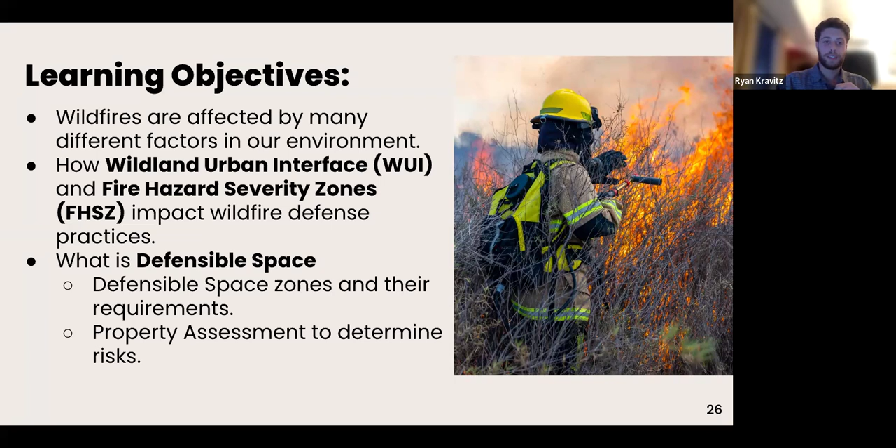By thinking home first when it comes to fire mitigation, we are able to accomplish so much. I'm sure some of you are familiar with the term home hardening, which is wildfire mitigation - getting it away from the home. That's what us as an agency, and typical civilians, can do for their homes to prevent fires from spreading. The effort should also include maintenance, design, and recovery.

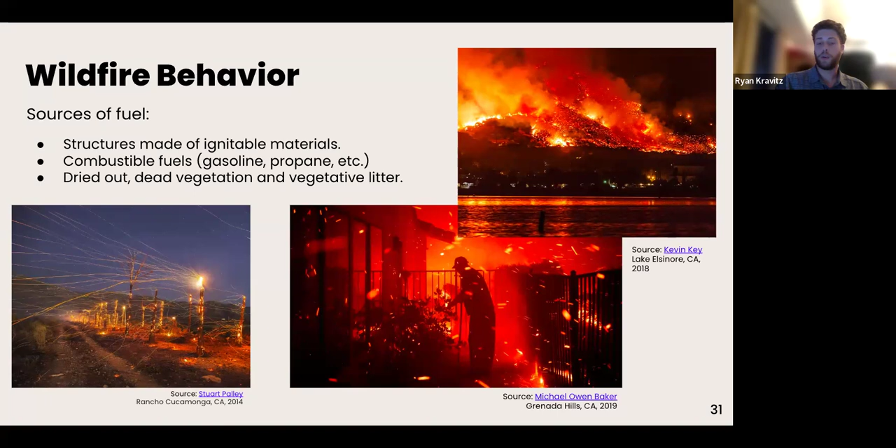They bring industry professionals in all the time to teach a class. So be good.

Ground fires are surface fires - no, ground fires are low-level, low-intensity fires which burn organic matter in the soil, such as peat or moss. Though they are slow-moving, it can be difficult to tell when they are completely out. They can easily turn into the next kind of fire, which is called surface fire.

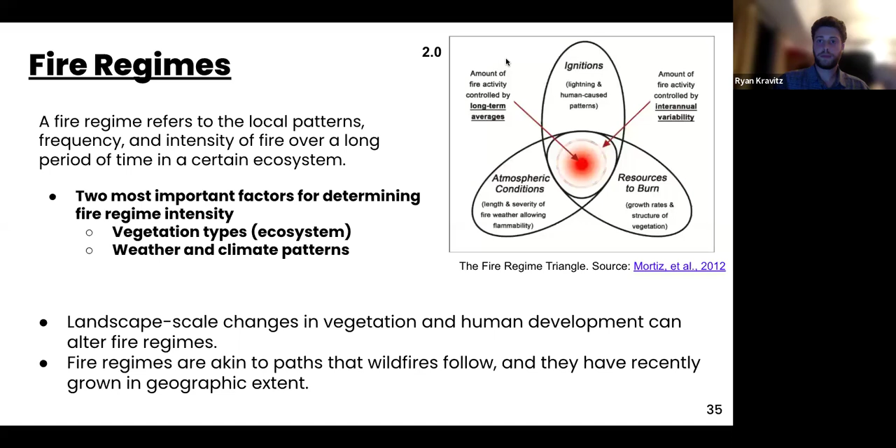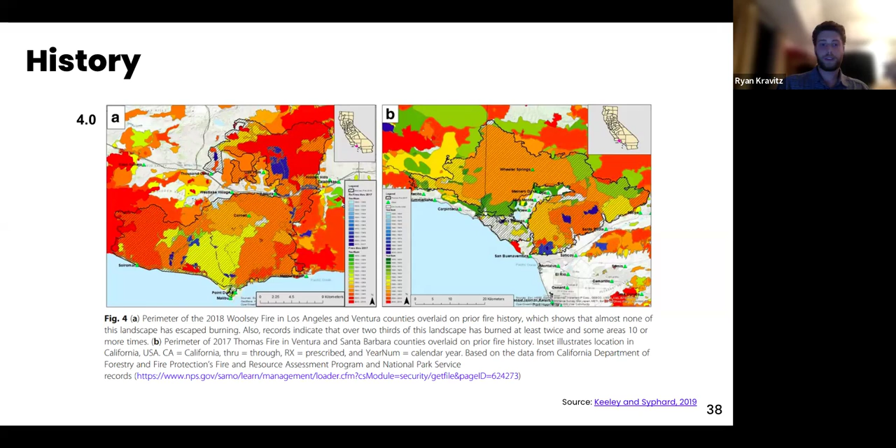This graph demonstrates the historical extent in a much more detailed manner. Records indicate that over two-thirds of the area shown have burned at least twice, with some burning as many as 10 times. So it's easy to say that none of this landscape has escaped burning. Burns have been a part of California's history, and as long as they're not too big or too frequent, they can be more controlled, and as you will see with home hardening, our safety and belongings can be kept out of harm's way.

With burns becoming more frequent, our landscapes... So let's take a look at climate change and how dry seasons and strong winds can affect the devastation.

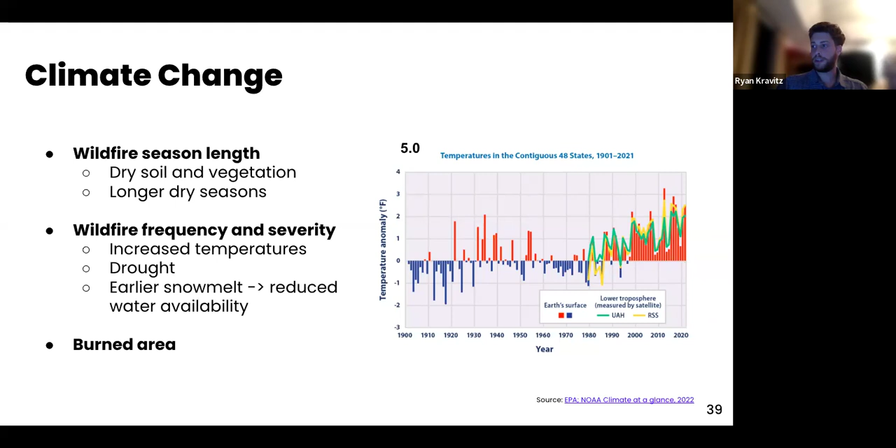Now we're going to get into the difference between wildland fires versus wildfires. A wildland fire describes any non-structure fire. These wildland fires can be helpful, and it's important to keep the structure and balance of the ecosystem.

Especially in California, where we get a lot of dry vegetation in the summer, it's a good idea to clear that on days that aren't windy and have a high moisture point in the atmosphere.

Wildfires, on the other hand, are unplanned fires that can come in contact with urban landscapes. These fires get out of control mostly due to human influence, and much of the driving fuel of wildfires is man-made structures, not vegetation, not the dry vegetation here. We'll expand on this shortly.

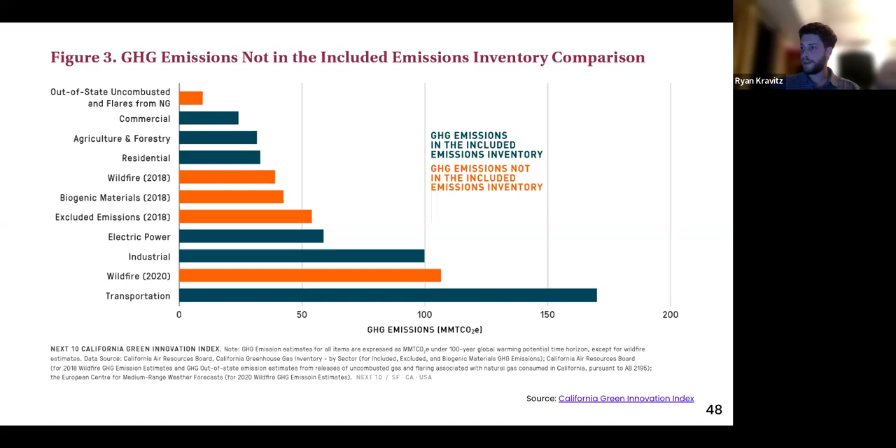So the fire hazard severity zone map assigns a hazard ranking based on fire likelihood and fire behavior, evaluating criteria such as fire history, existing and potential vegetation for a 30 to 50-year time horizon, local climate, topography, and ember production and blowing. There are 3 levels of hazard in the state responsibility areas: moderate, high, and very high.

You can search areas by address, and it's also available on CAL FIRE sites, where you can see it for the whole state.

Okay, and the very high fire hazard severity is identified within local responsibility areas. So those responsibility areas are displayed via the state, via localities, regions, and the full US, the federal responsibility. The Santa Monica Mountains, I know, are both a federal responsibility as well as a state responsibility, while the areas surrounding it are local responsibility.

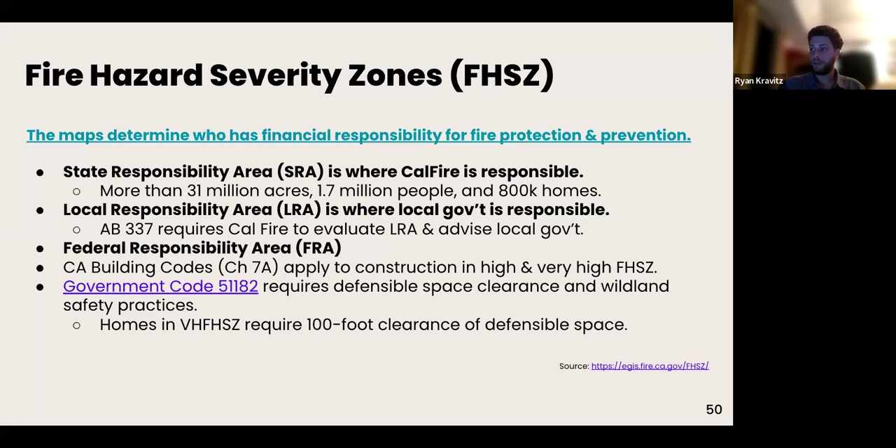So that's actually a really fun map. I suggest everybody goes and researches their own area to see who is responsible for the mitigation and for protecting their area.

So California State Parks has developed a well-balanced process to address these forest fuel management needs. Part of their practice includes wildfire management planning, vegetation management, fuel modification, plus services such as training, policy development, and more. They also create fuel breaks on its boundaries.

Neighboring landowners are offered guidance and, in some cases, even cooperative action when the defensible space needs align with the department's resources and land management goals. Another solution California State Parks offers is the boundary vegetation modification right-of-entry permit, which enables landowners to access state park lands to create the necessary defensible space required. As always, California State Parks recommends landowners contact their local fire agency to confirm their property meets home hardening and defensible space guidelines.

So here we have the wildland-urban interface. It is the zone of transition between unoccupied land and human development. It offers insight into the risk of the area and the inhabitants of those areas.

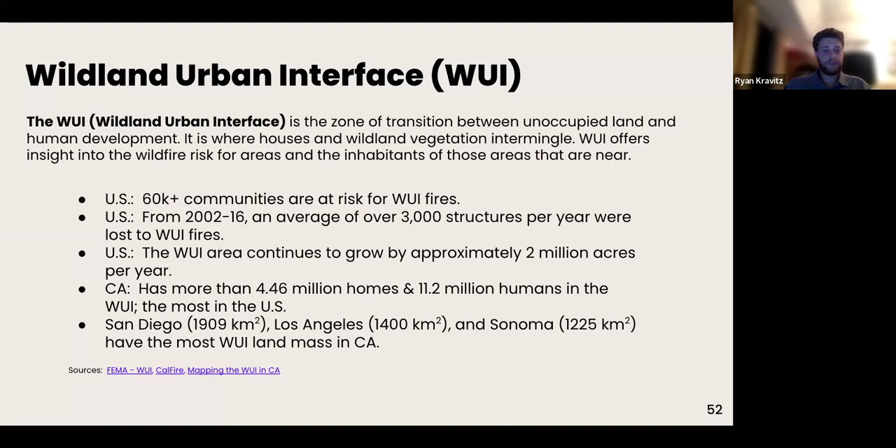Three terms that are used within the wildland-urban interface are wildland-urban interface, wildland-urban intermix, and wildland influence zone, each representing a different region. However, it is good to keep in mind the primary definition, as these terms are sometimes used interchangeably.

The wildland-urban interface is dense housing adjacent to vegetation, while the intermix is housing development interspersed in an area dominated by wildland vegetation subject to wildfire. And the influence zone is wildfire-susceptible vegetation up to 1.5 miles from the wildland-urban interface or the intermix.

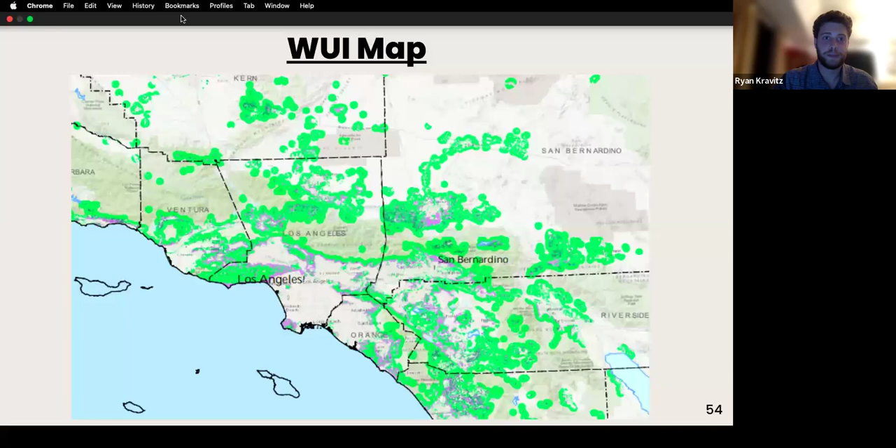So as you can see in this slide, the wildland-urban interface encompasses extremely large areas.

One application of the WUI comes with allowing us to know which communities are at risk.

The WUI areas continue to grow by approximately 2 million acres per year. In 2018, it was reported that it grew more rapidly from 1990 to 2010 in certain areas. The number of new houses grew, and land area grew as well. Housing development is attributed to 97% of wildland-urban interface growth, and this results in more wildfire ignition, putting more lives and homes at risk.

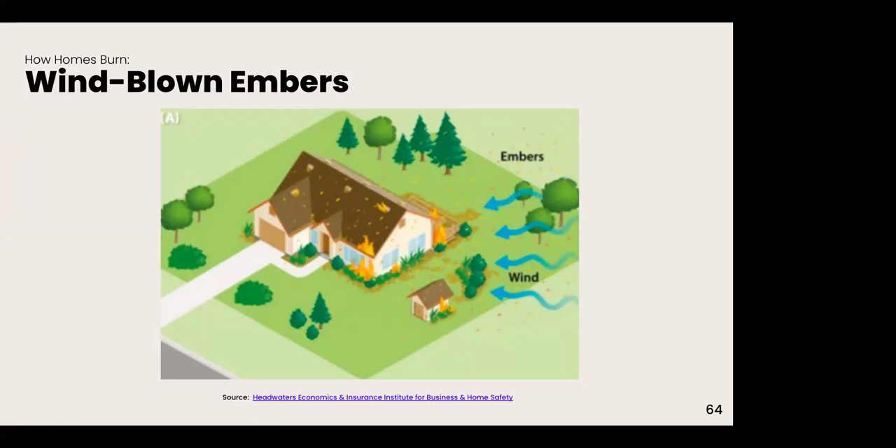Flying embers are wind-driven embers from a home or wildfire that can destroy homes miles away without igniting anything in between. They're responsible for up to 90% of building ignitions. They are the greatest danger when they can gain access to a home's interior. With the Santa Ana winds, embers are our greatest concern for home ignitions.

Radiant heat: high heat from a proximate fire can ignite some home exterior materials. It can also compromise windows, gaining access to highly flammable home interiors. If there's a source of radiant heat nearby, external building material can be damaged, such as vinyl siding.

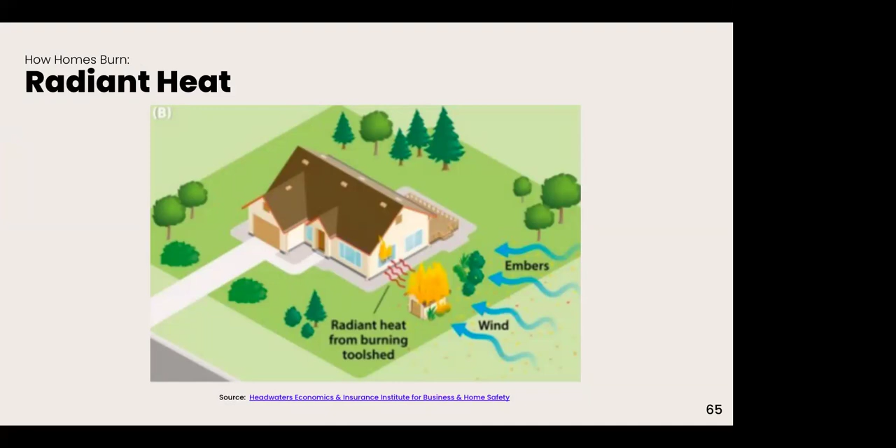Direct flame contact: a wildfire front can overtake a home. The flaming front of a wildfire moves so fast that it is less likely for a home to ignite from direct flame contact.

Let's take a look at some vegetation management. In this section, we're going to focus on fire-resistant construction. We'll dive deeper into vegetation management in the next section.

Roofing and vents: Class A fire-rated roofing products such as composite shingles, metal, concrete, and clay tiles offer the best protection. Inspect shingles or roof tiles and replace or repair those that are loose or missing to prevent ember intrusion. Box in eaves, but provide ventilation to prevent condensation and mildew. Roof and attic vents should be screened to prevent ember entry.

Decks and porches: never store flammable materials underneath decks or porches. Remove dead vegetation and debris from under decks and porches and between deck board joints.

Siding and windows: embers can collect in small nooks and crannies and ignite combustible materials. Radiant heat from flames can crack windows. Use fire-resistant siding such as brick, fiber cement, plaster, or stucco, and use dual-pane tempered glass windows.

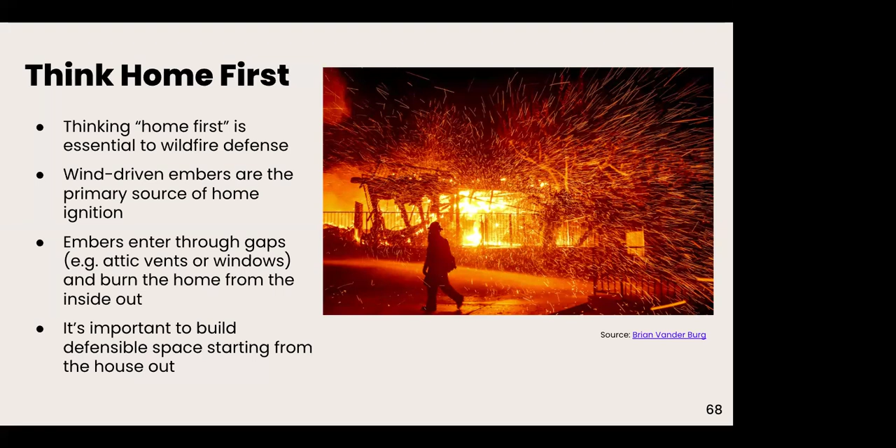What do you think was the difference in these cases? The fire professionals who walk sites like this have made observations and recommendations for all of us to follow.

Now let's take a look at relative costs and priority level. Relative cost indicates the relative cost of upgrading the listed features with ember-resistant material and design. The priority level indicates the features most vulnerable to wildfires and embers. Keep in mind each situation is unique and may change your priority level.

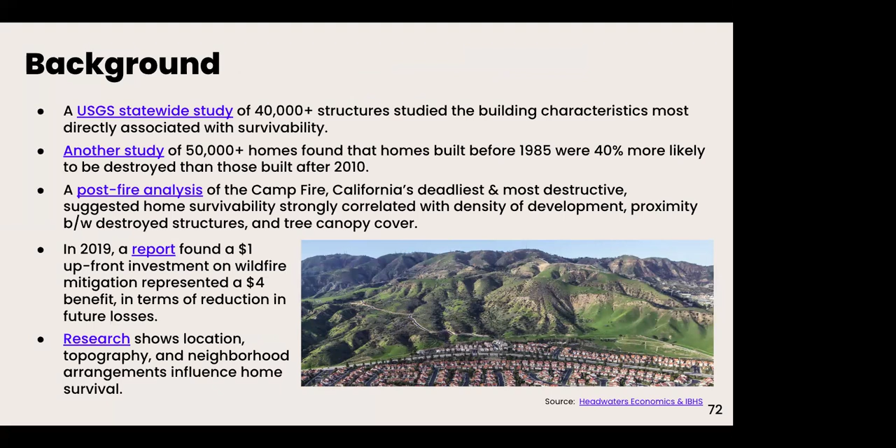Just a brief overview: the material needs to withstand fires and associated heat without making the fire worse, so it can't melt, can't readily transmit heat, and can't combust. Non-combustible refers to material wholly resistant to igniting and burning when in contact with fire. Materials passing ASTM E136 are considered non-combustible. Ignition-resistant material resists ignition or sustained flaming combustion sufficiently to reduce losses from wildland-urban interface configurations under worst-case weather and fuel conditions at wildfire exposure of burning embers and small flames.

Materials must meet one of these requirements: extended ASTM E84, UL 723 test, or ASTM E2768, non-combustible material, or fire retardant treated wood.

The images shown here are examples of experimentation used to determine standards and performance of materials and structures. The top image is a chamber that evaluates materials to determine if they meet requirements to be considered ignition-resistant. The second image demonstrates a vertical furnace that tests the performance of wall assemblies.

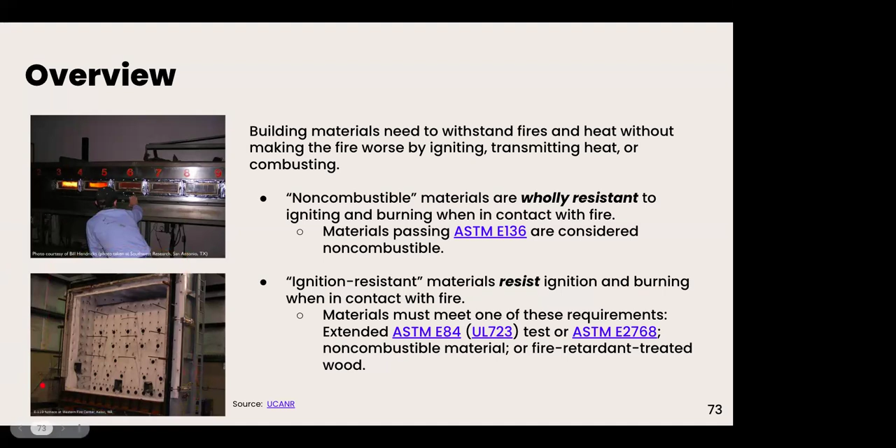As we explore the various areas of the home, the information will follow a general format: some background information including codes, standards, and sources. We provided links so you can review in depth afterward, what you need to do, what to be mindful of, and the importance of maintenance.

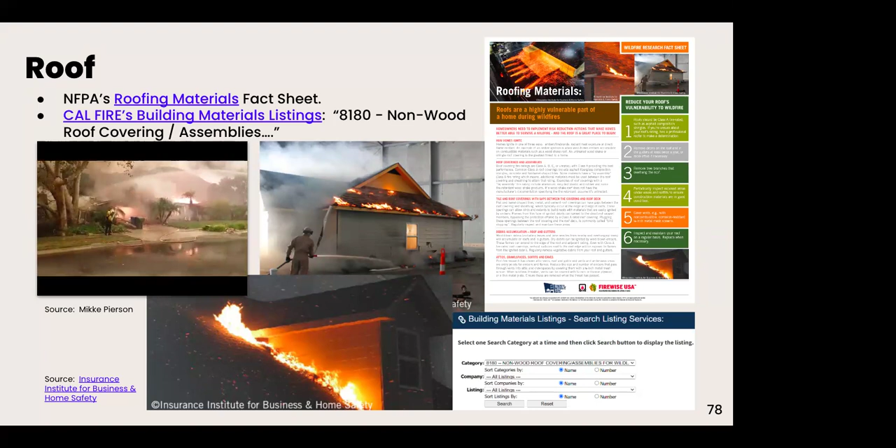In this case study, the Defensible Space Project demonstrates sensitive ways of building in the wildland urban interface. Ryan, can you hit play?

Is there sound? Yes. Sorry everyone, maybe it's just my computer.

Very important: anytime you have a site wall that connects to a building.

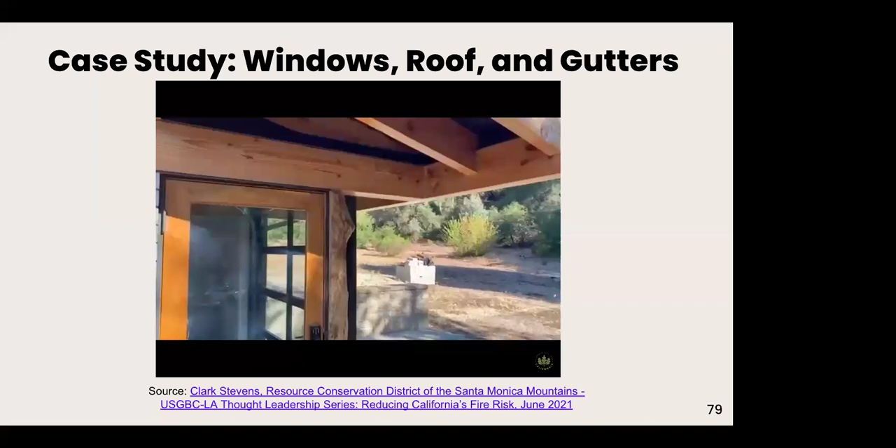Let's talk about vents. The image refers to the golf tee test. If the tee does not fit through the mesh openings, that is all you need to finish construction.

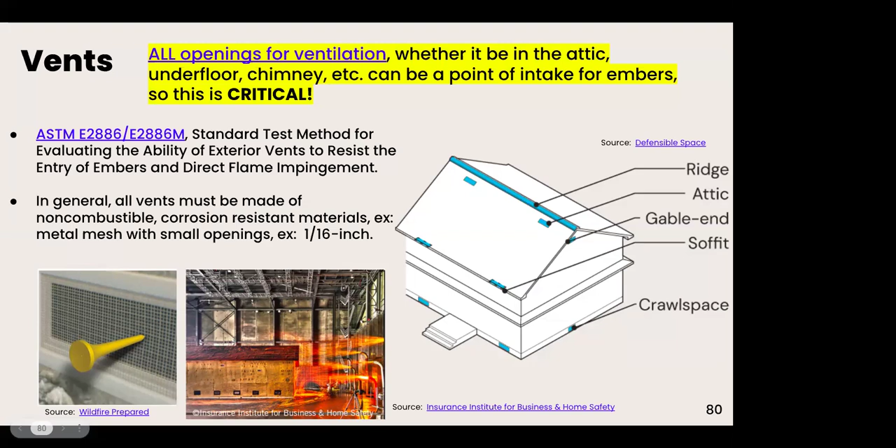So the Vulcan vent has a honeycomb matrix sandwiched between screens. Second is the fire guard vent, which combines a screen and a fuse link device that, when activated, closes the vent with a metal door. Lastly, the brand guard vent has a baffled design that is ideal for attic vents and eaves or cornices.

Here are the standards for vents and the NFPA fact sheet.

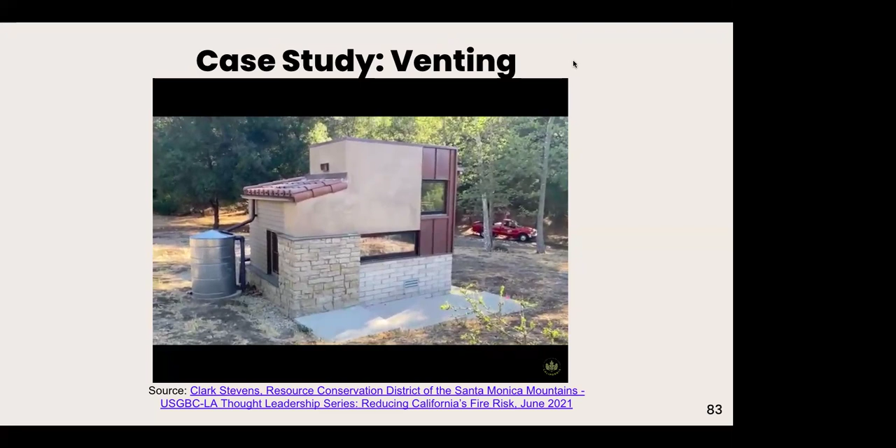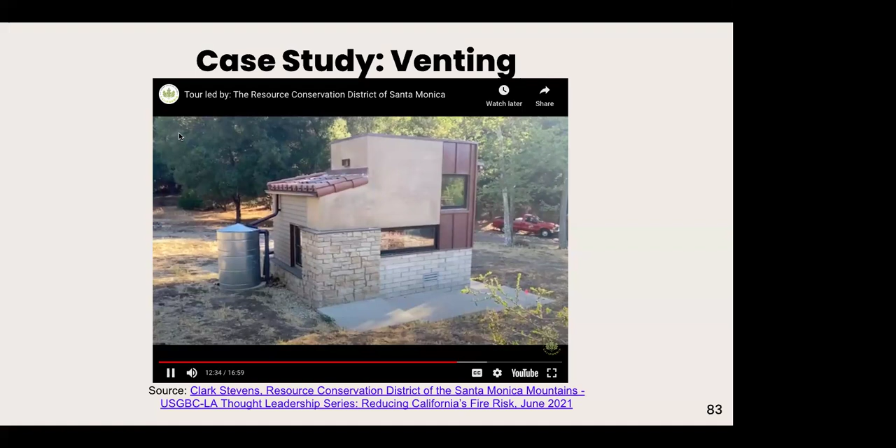Two manufacturers specialize in ember resistant venting. One is O'Hagin and the other is Brand Guard, and they both offer a number of different products for different venting conditions.

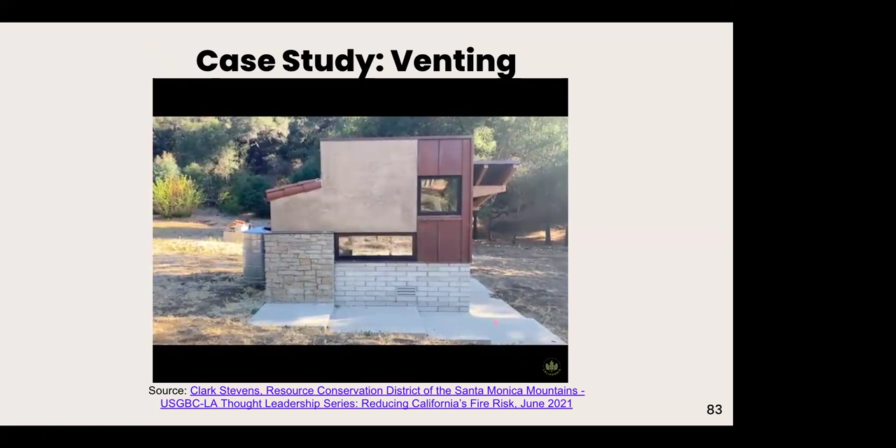These manufactured vents use interesting interlocking techniques, almost like flashing, with ember traps mixed with a steel wool type structure. They're quite specialized and very effective, but short of re-venting your house, both manufacturers will help you make sure you've got sufficient venting.

But short of that, a less costly approach with wind-driven fire season approaching is just to cover those vents, any vent conditions you have, with something to get them down to an eighth inch maximum opening.

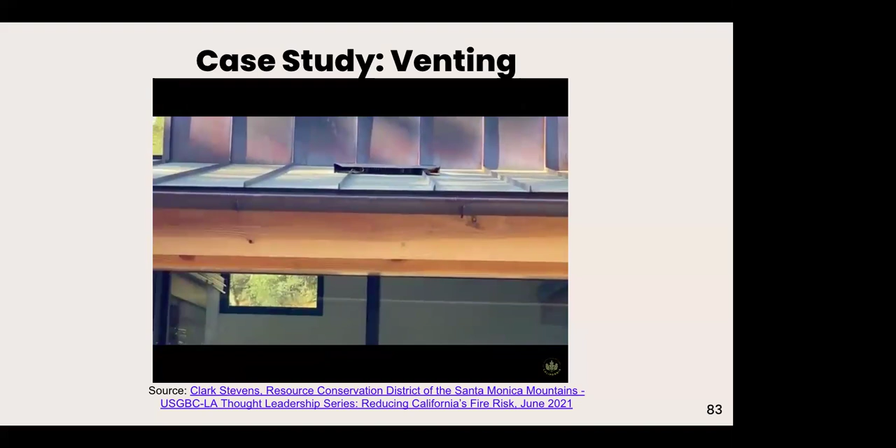So on the south-facing overhanging roof here, you can see another fire-safe vent condition. You can almost see inside the baffles that are part of that. But this is actually another fire-safe vent that is available to work with, in this case, a standing seam metal roof.

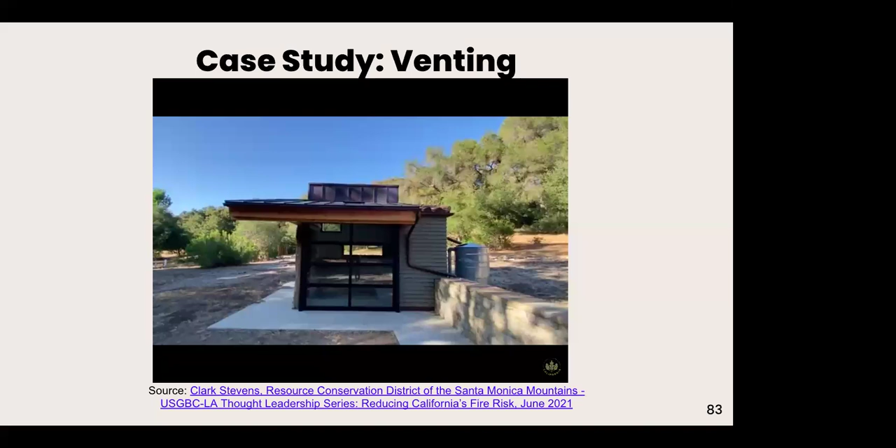It just shows you that, again, with the copper, all of these features can be integrated into many different design languages. The reason we focus so heavily on vents is because that is the predominant point of entry for embers, and many homes effectively burn from the inside out.

So to continue our conversation about venting, basically just talking about vents: there are two manufacturers that specialize in ember-proof venting, O'Hagin and Vanguard. You can use these for vent replacement or new construction. Both are excellent products. We recommend a high effectiveness fix to overlay vented conditions with an eighth inch mesh, which is another copper venting example.

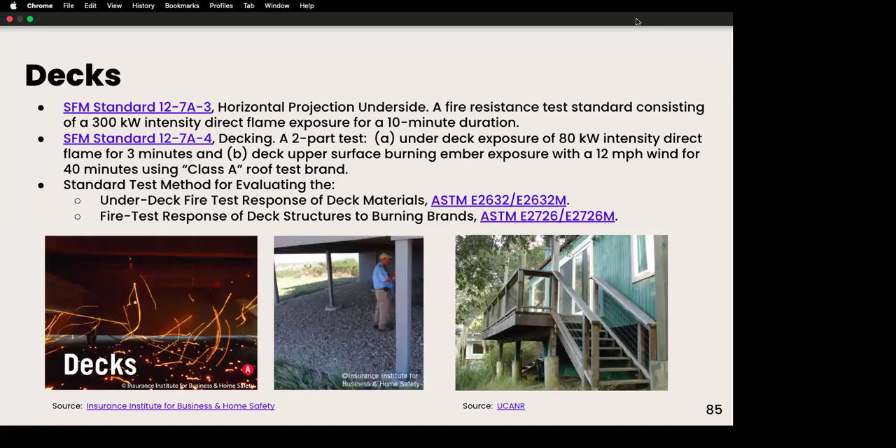127A4 is about decking. It's a 2-part test which involves under-deck exposure of 80 kilowatt intensity direct flame for 3 minutes. If we could just mute our mics when we're not talking, please.

The next part is deck upper surface burning ember exposure with a 12 mph wind for 40 minutes using Class A roof test brand - the standard test method for evaluating under-deck fire test response of deck materials, and fire test response of deck structures to burning brands.

Decks are one of the most common areas we see issues when we go on these evaluations, so it's super important.

Next slide. Materials must meet performance requirements. They need to be non-combustible materials - lightweight concrete, tile, metal, fiber cement, or fire retardant treated wood. This includes other components such as the joists, the posts, and the railings. The goal is to create a non-combustible zone around and under the deck.

Keep a gap of 1/4 inch between deck boards, joist spacing of 24 inches with a foil-faced self-adhering adhesive flashing tape down 2 to 3 inches on each side of the joist. Maintenance is super important - being mindful of debris collecting in the gaps and removing combustible items on the deck or under the deck. I see a lot of people storing wood piles underneath the deck or flammable furniture on top of the deck, so it's super important.

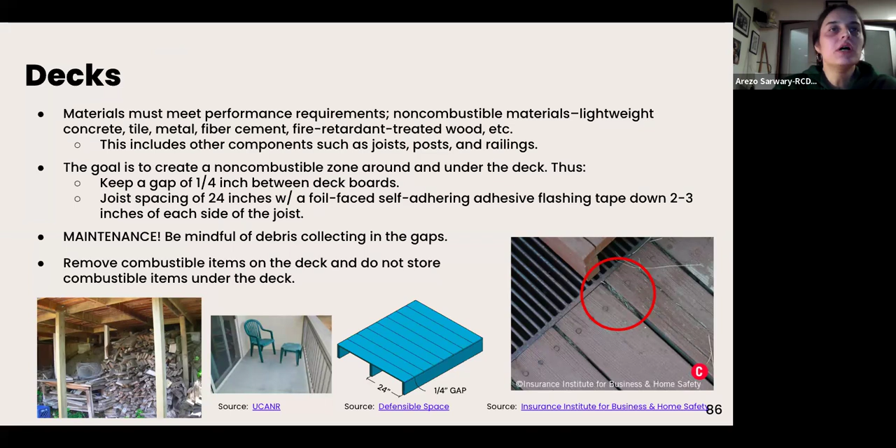Next slide please. We're going to watch a little case study called Fire Rebuild in Malibu on Bush Drive. The original house was lost during the Woolsey fire in 2018.

The roof can be one of the most vulnerable parts of a home to a wildfire. It is important to design this so it is free from debris and has a Class A rating. Any wind-driven embers can touch down on debris on the roof and start a fire. Wind-driven embers can also get into vents and actually start a fire from inside the home.

The roof here is flat with a gentle 2% slope, and it is made up of several layers that contribute to give the overall assembly the Class A rating. This consists of fire-rated sheathing and a dense fiberglass layer.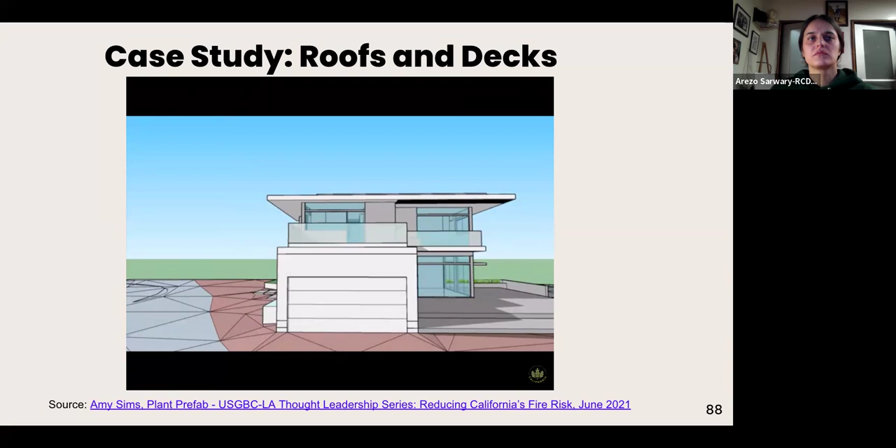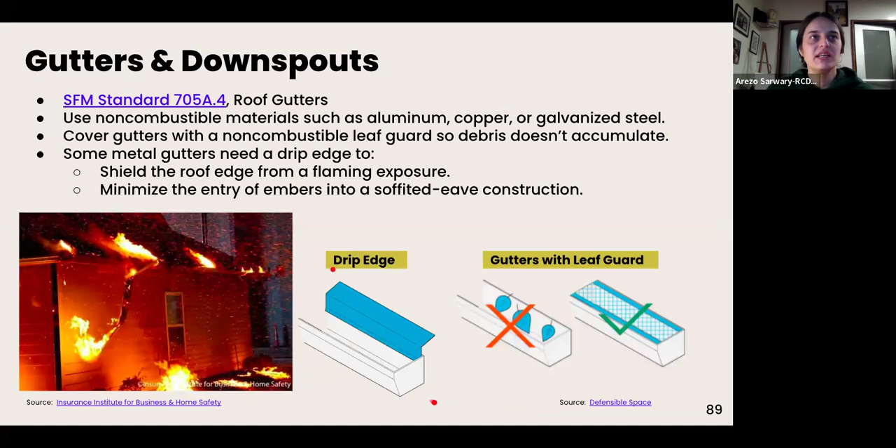For windows and skylights, SFM standard 12-7A-2 for exterior windows is a fire resistance test standard consisting of 150 kilowatt intensity direct flame exposure for 8 minutes. Then NFPA 257 is a standard on fire test for window and glass block assemblies. The basis here is non-combustible materials, so the windows and its components resist breaking or melting under high heat. The framing should be done with non-combustible materials like metal or metal-clad wood, and exterior window shutters made of non-combustible materials like metal can mitigate risk because they are unlikely to succumb.

Window options are relevant anywhere there are external windows, even small ones like the shower ones or in partitions on the door. Do not use wooden or plastic materials. Do not use plastic glazing or annealed and ceramic glass.

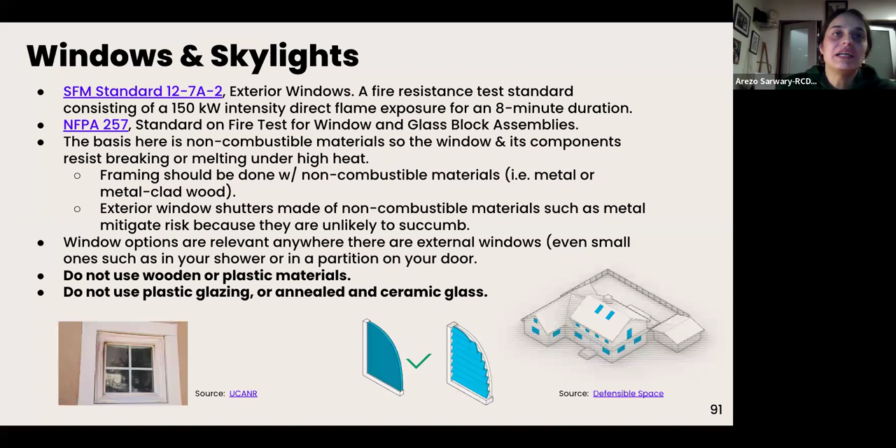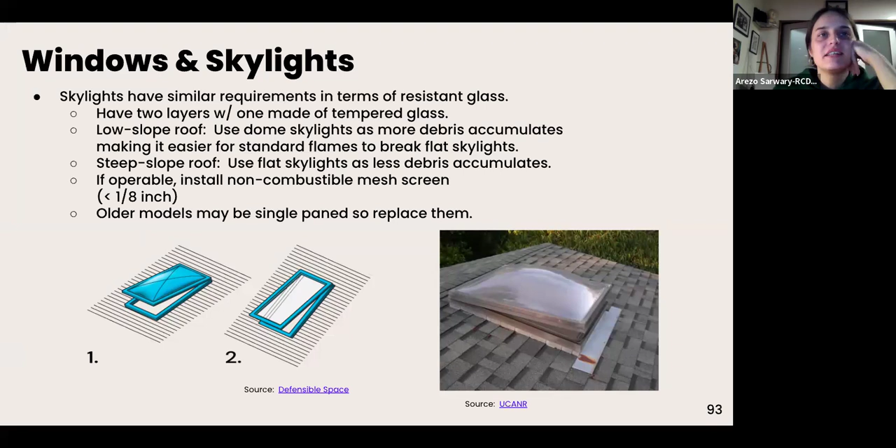The image on the bottom right here is an example of a skylight that's vulnerable because the outer layer is made of plastic. For best performance, it's recommended that the skylights consist of two layers, with one of them consisting of tempered glass. And obviously screening it off is a good option if you're going to be keeping it open a lot, especially when they're not home.

See image 9 in the handout for the CAL FIRE building materials list.

And as always, maintenance. Do not let debris accumulate - very important. There's a skylight completely covered with leaf litter.

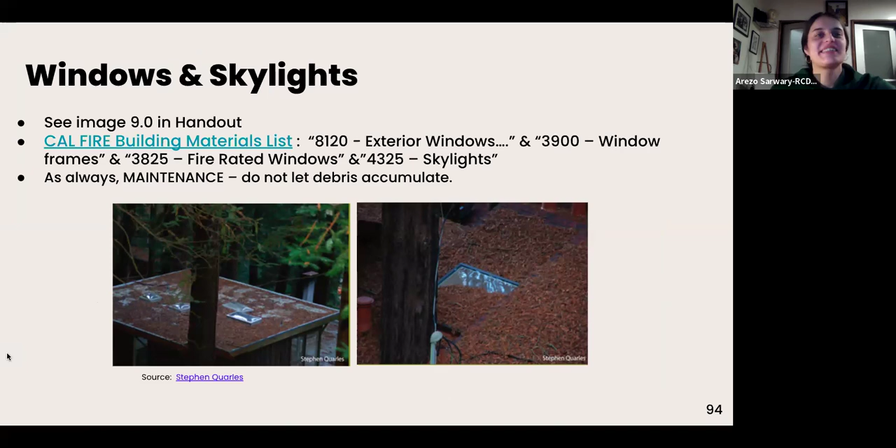Exterior doors and garages. NFPA 252 is the standard method of fire test of door assemblies, fire resistance rating of not less than 20 minutes. This means meeting performance requirements of SFM standard 707A 3.1, in accordance with ASTM, as well as SFM standard 12-7A-1. This applies to all exterior facing doors and garage doors.

So in essence, the door framing and the exterior surface or cladding must be of ignition resistant and non-combustible material. And it's critical to cover gaps to prevent ember intrusion. Installing adjustable weather stripping that meets UL standard 10C on the interior side of the door frame is also good.

If the door has a glass panel, it must meet the window requirements - same goes for sliding doors or garages with window panels. For garages using ignition resistant and non-combustible materials like metal, you can install weather stripping that meets UL standard 10C. For the exterior trim, consider fire retardant treated wood or fiber cement board.

As always, maintenance is critical: removing debris around the exterior, removing doormats as they're likely made of combustible materials, and trimming back vegetation near doors and garages is also very important.

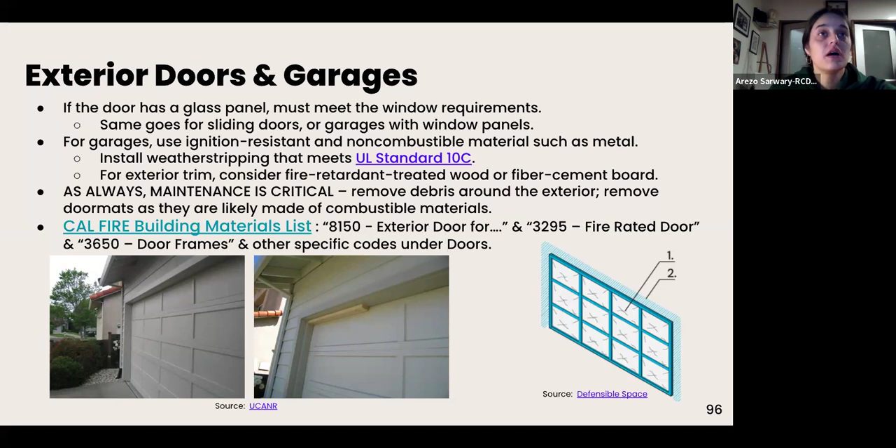Next, we're going to look at this case study on a tour of the first phase of a defensible space project, demonstrating sensitive ways of building in the WUI.

The garage door is doing a couple things that are appropriate in a wildfire context. One is that it's true divided light construction, so it's insulated glass. This demonstrates also what you would do on a large window wall, even if it wasn't a garage door.

You see true divided light, insulated glass, and that's important because what causes glass to break is not just the condition of the glass itself. You'll hear that single pane glass is a weak point relative to heat and wildfire resistance, and that is true. However, if you have an insulating piece of glass and you do get sufficient heat to break that outer pane, the inner pane has about 30 seconds before it goes too.

So what makes glass break is not just that insulating condition or the lack thereof, but also the size of the area. The differential between the glass that is within the frame and the heat or temperature of the glass at the center of the frame is what causes glass to crack. So smaller pane glass areas collected to make a large area of view is preferable to a large single sheet of glass, whether it's insulated or not.

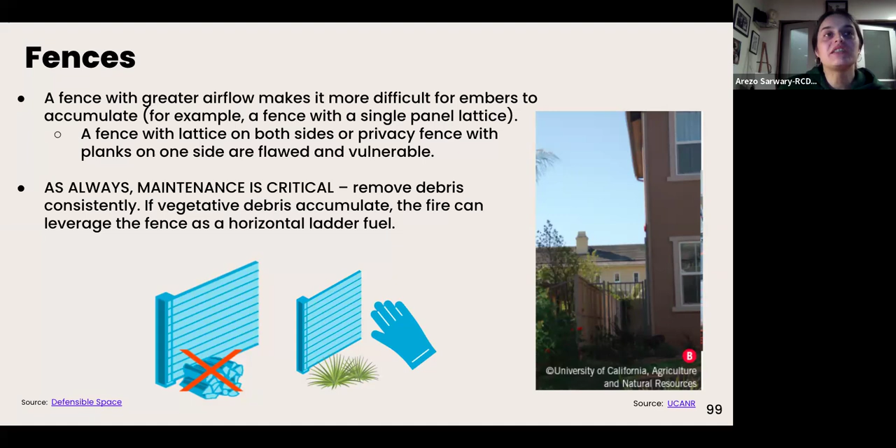Again, maintenance is critical - removing debris consistently. If vegetative debris accumulates, the fire can leverage the fence as a horizontal ladder fuel.

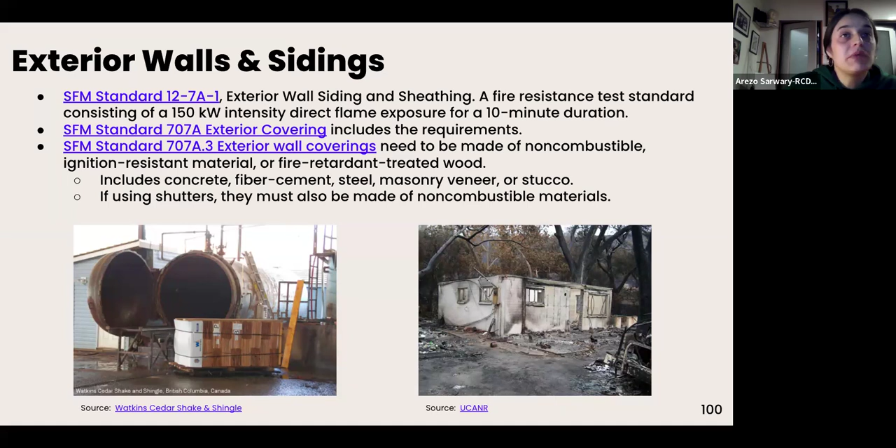So we'll watch a little case study now about siding, framing, and windows.

Material choices have a big impact on the fire resilience of your home. If the siding ignites, a fire can penetrate the stud cavity and work its way into the home through any air gap, window, or even a dryer vent. By using stucco, a non-combustible material, we are adding another defense layer against embers and potential fire spreading.

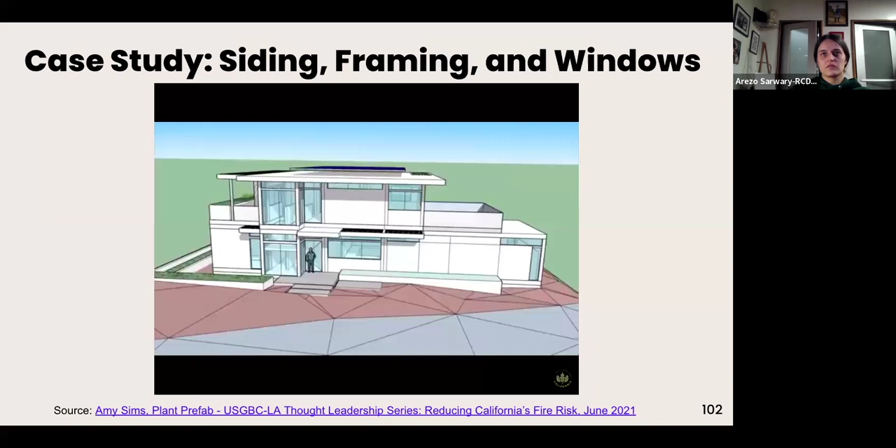As stated earlier, all vents and openings in the home to the exterior become potential points of entry for embers. For this reason, it was decided not to vent the crawl space the traditional way through the foundation wall. Instead, this home has a mechanically vented crawl space, so no debris or embers can enter, and the only access into this area is through the inside of the home.

Fire suppression within the home is now a code requirement. This home is designed with an interior fire sprinkler system.

Additionally, multiple hoses and hose bibs will be installed throughout the property and the exterior decks, long enough to reach the top of the house, so in the event of a localized fire, the homeowners can act swiftly to try and control it.

All right, so now we'll talk about eaves, overhangs, and soffits. This photo on the left is by Stephen Quarles, from an IBHS experiment on open eave design, which demonstrated the flame impingement exposure, the time to ignition, and the lateral flame spread were all worse in this type of design.

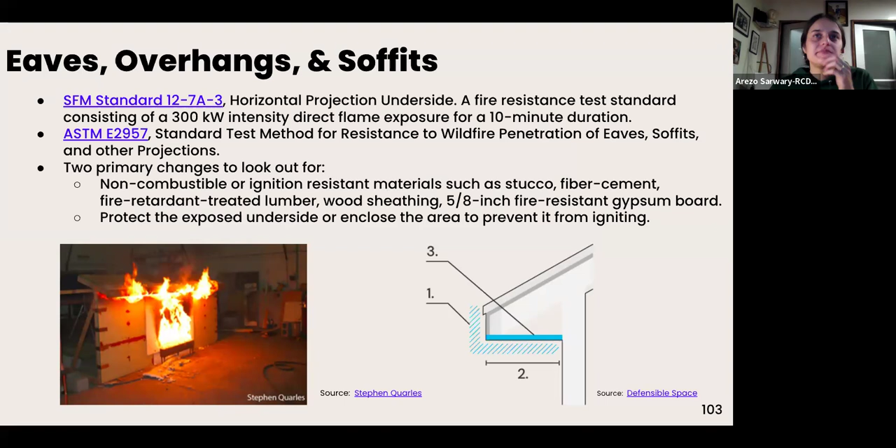Next slide. The photo by Wildfire Prepared demonstrates how a soffitted eave looks. The middle photo by Stephen Quarles again demonstrates, in part A, open eave construction with vents and blocking, and in part B, gaps between blocking and other wood members in the under eave area.

For new builds, constructing without overhangs may be an easier solution. And definitely don't use vinyl, untreated wood, or metal, as they will succumb or transfer heat.

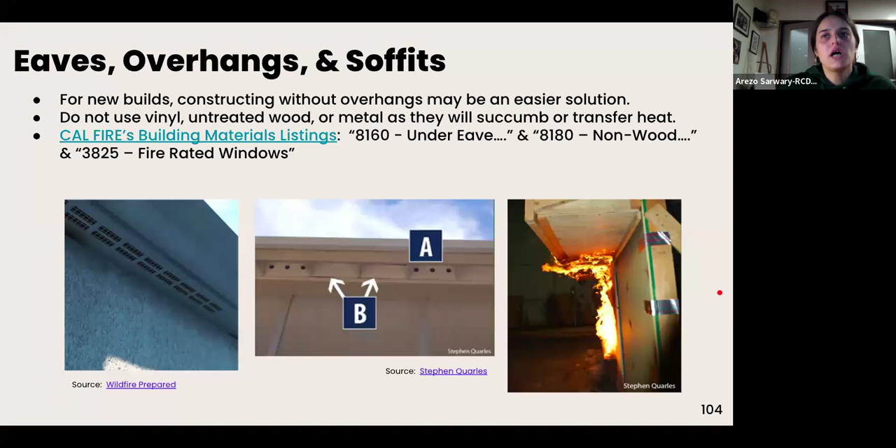So we'll watch a little case study next about wall framing.

Different strategies here to show as many different approaches for wildfire resilient construction as possible in this little structure. One of the things you'll notice here is a wall. It's a wall you can sit on, and it is a literal extension of the building wall.

This is obviously fire safe and non-combustible construction. That's very important. Anytime you have a site wall that connects to a building, it will need to not conduct fire from the landscape through a flammable site element such as a wood fence to the structure.

It's obviously not everything on this surface is non-combustible, right? That corner post is a piece of oak that was salvaged from a deadfall right over there and milled into this corner.

What's important is that there's an apron, a skirt that's easily cleaned. This pebble finish concrete here, and that is also heavy timber. The bungalow style elements are obviously quite beefier than you might have in a typical exposed wood condition, and heavy timber is much more difficult to ignite than lighter construction. So you can see everything is a minimum of 4x dimension, and most is 6x or thicker.

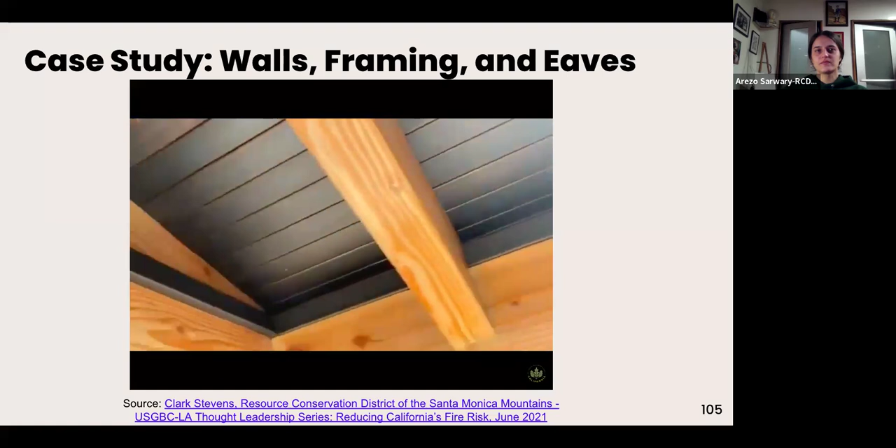Even our decking, you can see here, that is not wood decking. That is a lighter gauge cold rolled steel that looks a little bit like patina decking. So again, we're showing that architectural language is possible in an extremely fire resilient condition.

Other standards include the California Building Code Chapter 7A, ASTM E84, standard test method for surface burning characteristics of building materials, and E2768, standard test method for extended duration surface burning characteristics of building materials, which is a 30-minute tunnel test, and these other ones for your future use.

And let's go to the next slide.

So now we'll talk about assessments and insurance, handout number 11. Some insurance companies will not take new claims in fire-prone areas. I've been hearing from a lot of homeowners they're having insurance issues. So calling an insurance company is a good way to assess an individual home's wildfire risk. The company can provide a FireLine score, property-specific hazard scores based on risk factors such as fuel, slope, and access, identify risks and vulnerabilities to windblown embers, as well as community level mitigation information and historical wildfire activity.

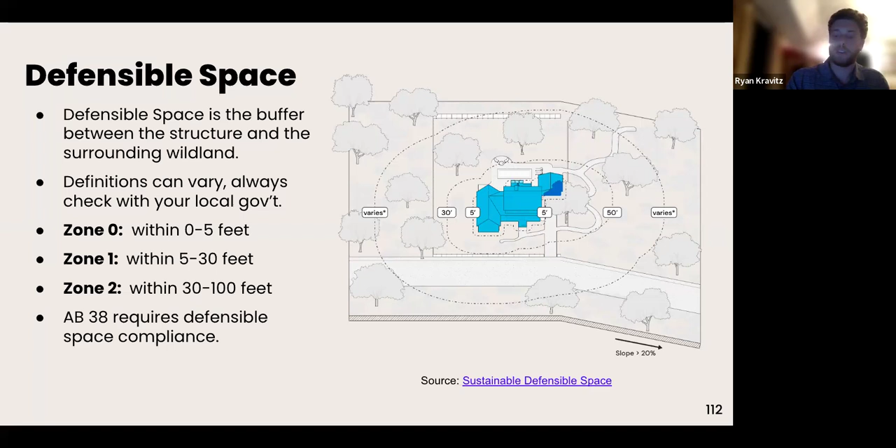This is a wildfire defense that is extremely important, though definitions can vary. Despite the different names you may hear, the sizing remains the same. In the left and right images, you can see intermediate zone and immediate zone, which we refer to as zone 0 and zone 1. They are the same approximate amount of feet. Zone 0 is 0 to 5 feet, zone 1 is 5 to 30 feet, and zone 2 is 30 to 100 feet. That would be the same no matter what kind of terminology you are using.

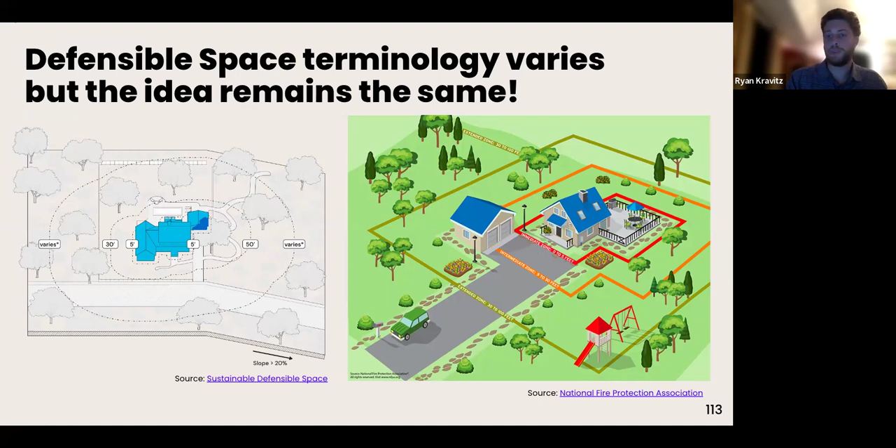Residents play a major role. Never think of yourself as just a resident. Defensible space, landscape design, plant selection, and maintenance are massively important to your home survival. That 100 feet of defensible space gives firefighters more time to help other places and helps you more effectively. Within the wildland-urban interface, firefighters often face limitations with terrain and access. Fire department can't be everywhere at once. 100 feet gives more safety to firefighters.

Irrigation, pruning, and upkeep of dead material mitigates risk. This is all a part of maintenance. While plants with high moisture content and low dead material are ideal, proper maintenance of wildfire-prone species gets rid of risk. All plants can and are flammable, so once you've chosen your fire-resistant species, you must continue to be alert for that maintenance.

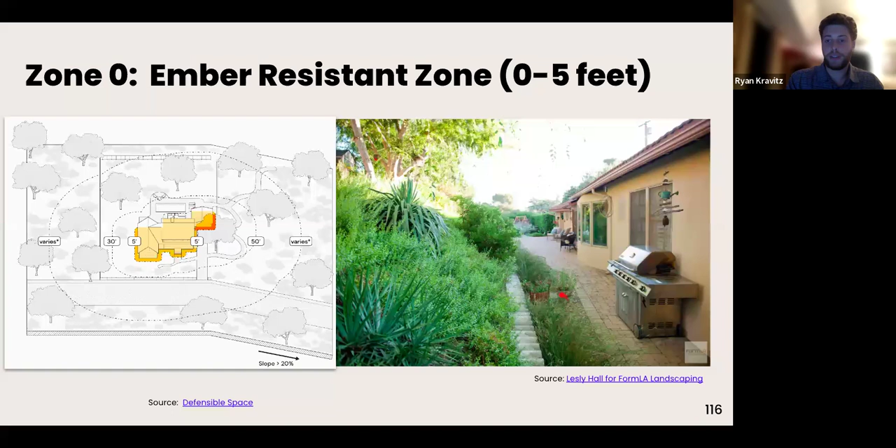Zone 0 covers the first 5 feet from the building. As you can see, this barbecue grill is within zone 0, as well as this furniture and these perennial grasses as well. Because of its proximity and positioning to the structure, it is the most important. The first 0 to 5 feet around the house has the greatest impact on reducing the risk of losing a home to wildfire. The solution is to design this area to keep fire and or embers from igniting material that can spread to the structure. Effective strategies include removing whatever may catch, clearing decks, gutters, and porches, and clearing branches as well, as those can act as a ladder.

In this area, we don't want any combustibles. So all firewood and lumber, fences and gates. Avoid petroleum-based products, which generally include waste collection carts and patio furniture, like we saw. Vehicles should be moved away from this zone, as well as tree bark or mulch.

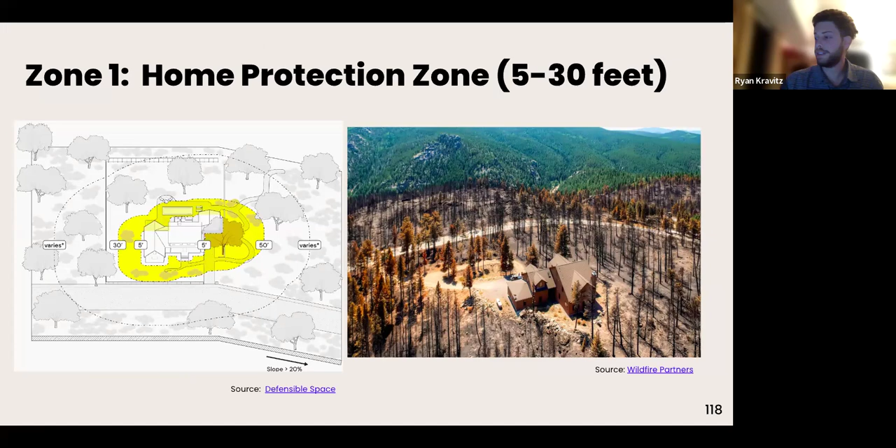Zone 1 covers the 5 to 30 feet extending from the building structure outward. In this zone, well-watered is perfect for extinguishing embers, slowing the fire spread, maintains separation of distance between trees and shrubs that could catch fire, as well as patio furniture, wood piles, and swing sets. Planting natives that are consistent with the fire department requirements aids, as well as ground covers and shrubs with an occasional small tree preferred, as well as drip irrigation systems. Otherwise, the priority remains the same: maintenance and limit items that can be made combustible.

Because homeowners may have adopted an out of sight, out of mind approach, remove all things that may come seasonally: tree branches that hang over the roof, trimmings, and definitely keep them 10 feet away from the chimney as well. Remember to maintain flammable plants by pruning or removing from this area as well.

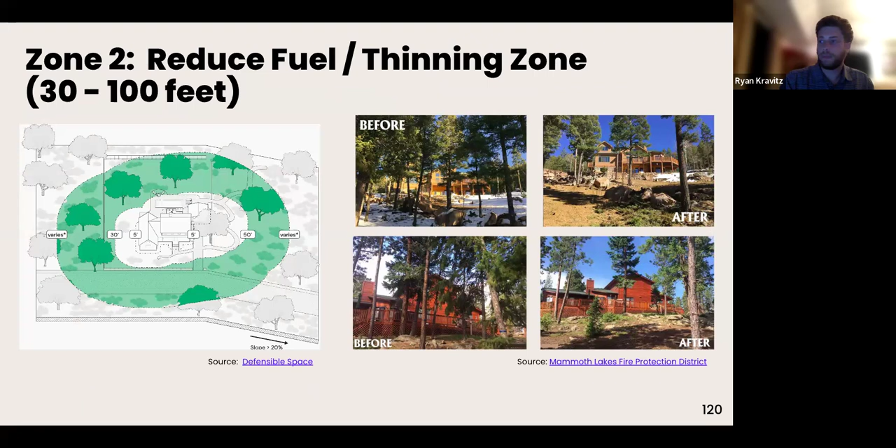Zone 2 represents the region of 30 feet to 100 feet beyond the building. In this zone, you want to reduce the fuel and thin it out, plant natives that are consistent, maintain horizontal and vertical spacing, maintain grass so it's a maximum height of 4 inches. All exposed wood piles must have a minimum of 10 feet of clearance down to the bare mineral soil in all directions. When using heavy equipment, try not to remove vegetation down to bare soil, as that can cause erosion and destabilize hillsides.

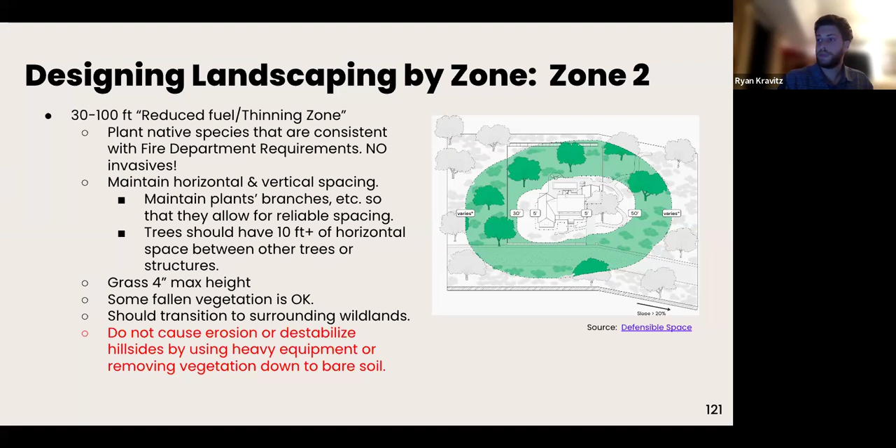Between the ground and the base of the tree, maintain 6 feet of clearance. Make it a priority to keep extra vertical space between vegetation. When vegetation is not spaced properly, the fire can intensify and move from the ground to the treetops exponentially, almost like climbing a ladder. The recommended formula for vertical spacing is 3 times the height of the underlying vegetation. So an example here, a 3-foot shrub needs 9 feet of clearance between it and the lowest branch.

Like vertical spacing, the goal here is the same for horizontal spacing. Trees 5 to 30 feet from the home need 10 to 18 feet of space. Trees 30 to 60 feet from the home need 10 to 12 feet of space. And trees 60 to 100 feet from the home need 6 to 10 feet of space.

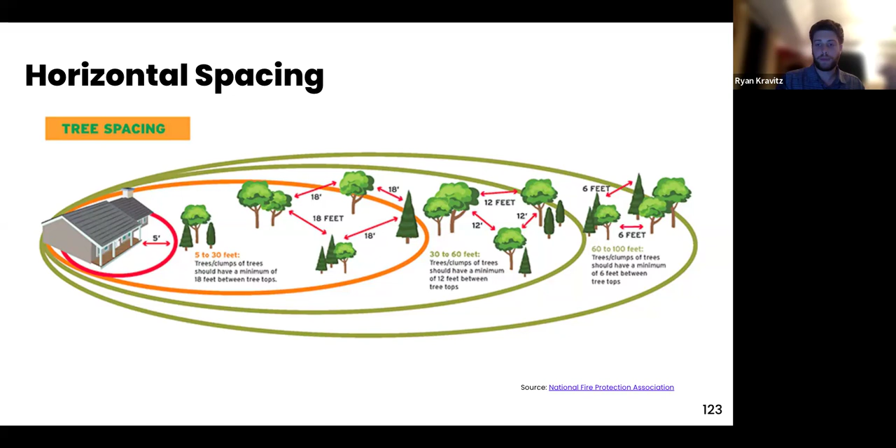Spacing on a slope is similar in terms of the goal. To interrupt the fire's path and keep flames smaller and on the ground, the spacing between trees and vegetation is greater on a slope, to prevent a continuous path of fuel for a fire.

Placement of plants when landscaping is just as important, if not more important, than the type of plants. Remember how native plants can act as a barrier. Fire will use poorly spaced shrubs as a ladder to climb to the canopy, causing crown fires. Preventing crown fires means the difference between a wildfire as a tool and a wildfire as a disaster.

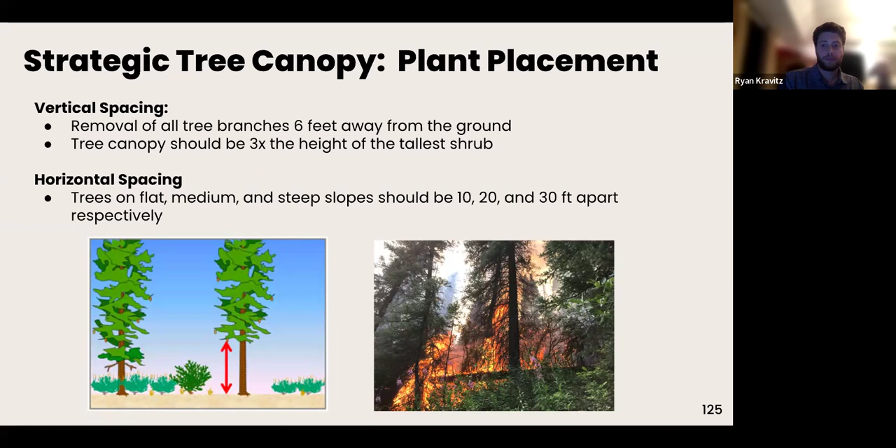So trees can be a protector, and trees can also be an accelerant. On one side, they absorb UV rays and offer oxygen and shade, which is important for us as well as the plants beneath them. While other trees and plants can act as a ladder for fires to climb onto houses and to spread.

Crowns of trees, the tops, should be at least 10 feet away from the house, where overhanging limbs over structures should be cut. This image is an example of an overhanging branch that is over the house, and we recommend that it should be removed.

When it grows leaves, those leaves may eventually fall and add as fuel to the roof there. Regular pruning is a good practice.

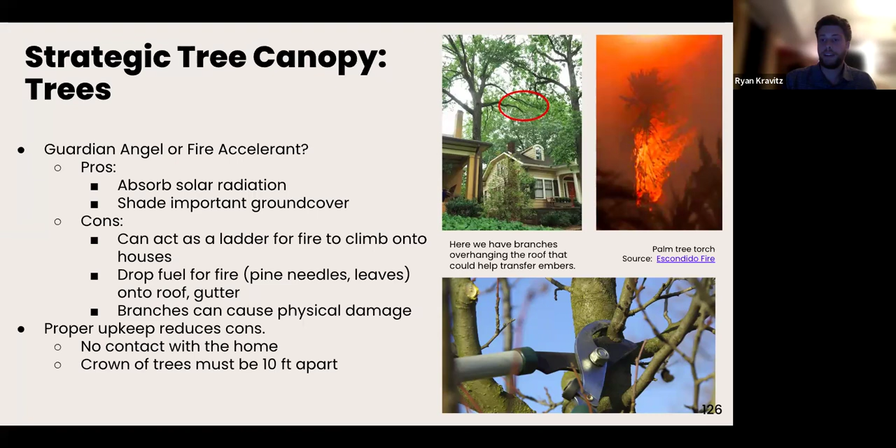And a choice of fire-safe plants should also include trees. Palm trees are invasive to the state as well as massive fire accelerants. They really should not be planted, especially in high or very high fire severity zones.

So here we'll watch a little video on the tree canopy.

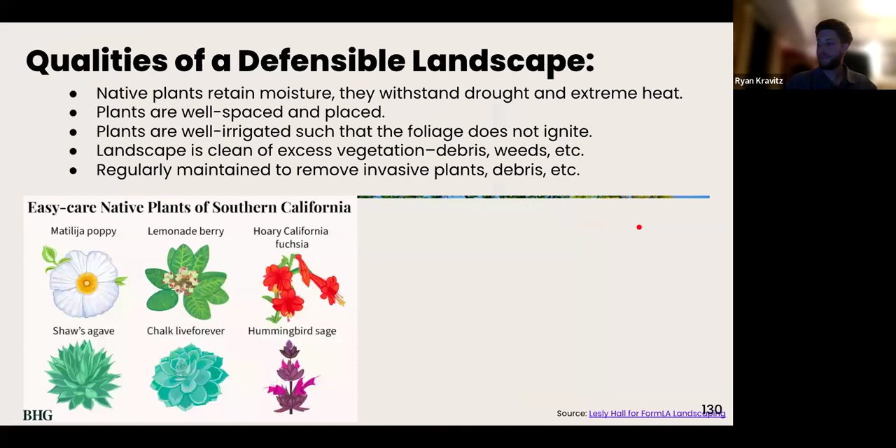For the landscape designs, generally we have native plants that retain moisture and are fire resistant as well as drought resistant. We space them well around. Sometimes a typical mulch may include what falls from the oak tree, the wood chips. Those would be preferable mulches, as well as drip irrigation, so that foliage does not ignite.

Always clean excess vegetation, debris, and weeds, as invasive plants like mustard will pop up in any patch of dirt at any time of the year. So it's really important to remain vigilant and remove them because they may be in the wrong spot at the wrong time. Here in this graphic, we have a number of native plants that would be a lovely addition to a garden, as well as a barrier for defensible spaces.

California native plants are best for wildfire resilient gardens, as they shield, they're ember diffusers, and they're slope stabilizers.

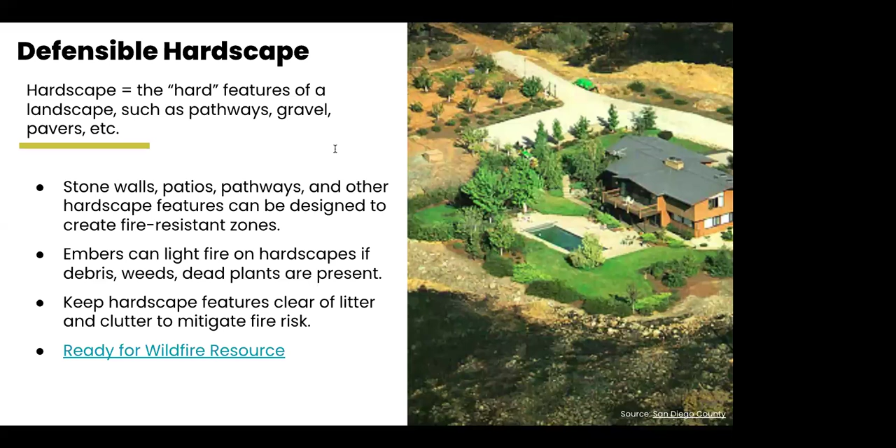Hardscape strategies by defensible space zone: Zone 0 is 0 to 5 feet. Use non-combustible materials for hardscape design, such as gravel, pavers, concrete, and decomposed granite. Remove vegetative debris and consider relocating garbage and recycling bins outside of this zone.

Zone 1 is 5 feet to 30 feet. Keep tree branches at least 10 feet from the roof, windows, chimney, and other trees. Relocate wood piles to zone 2, 30 to 100 feet, and create separation between trees, shrubs, and items that could catch fire, like patio furniture, wood piles, and swing sets.

Zone 2 is 30 to 100 feet. Exposed wood piles must have at least 10 feet of clearance. Create fire breaks with driveways, walkways, and patios. Distance detached structures, like garages, pump houses, and pergolas, at least 50 feet from the house. For maintenance, don't let debris accumulate on any hardscape features.

I wanted to add, a lot of the times when we go out and do evaluations, I notice that people have their barbecue propane tanks right along zone 0. You always want to have propane tanks more than 10 feet away from the house. Oftentimes I'll see gas containers too, so try to keep those far away from the house as well.

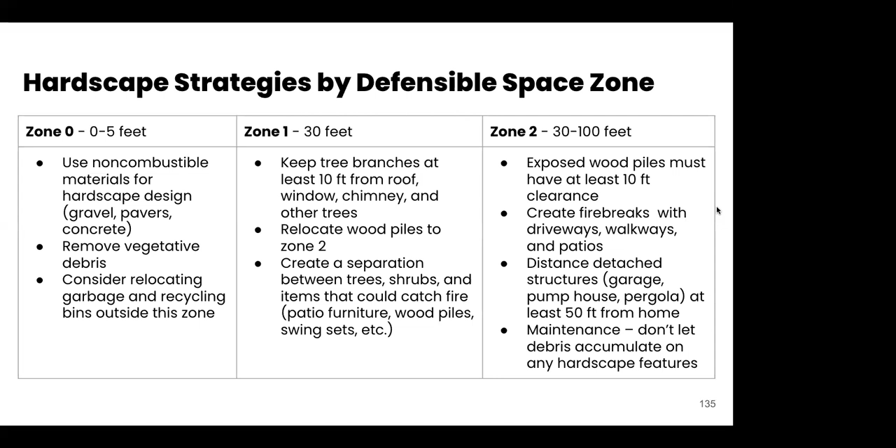Do any of you live in Camarillo? No? It's devastating what's going on right now, a result of Santa Ana winds. Just a quick comment, for those of you who don't have Watch Duty, it's a free wildfire alert app you can add to your phone, and it will give you updates on that fire and fires in 13 states. Yeah, it's a very resourceful tool.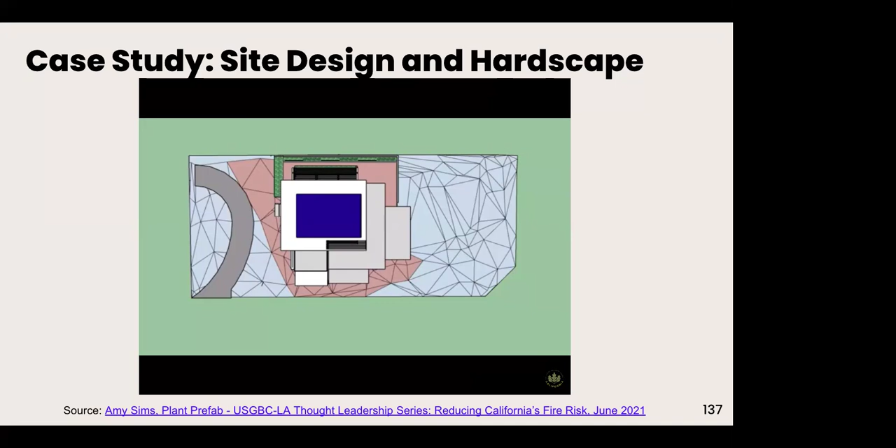The home is only one portion of good fire-resistant design. Being that this is a large lot, equal value must be given to both the home design and the site design, because any vegetation that grows on this lot affects the neighboring lots. Overgrown vegetation between the yards is an invitation to the spread of a wildfire. Particular placement of hardscape and softscape is key to creating a strong fire-resilient home.

The new home maintains the original footprint, but with Ray Kappe's design, the previous traditional one was transformed into a true California classic with a strong connection of the exterior to the interior. During a wildfire, homes can be threatened by wind-blown embers, radiant heat, and direct flame contact. In wildfire events, 60 to 90% of home loss is due to embers.

Embers are important because of what they can do directly, like ignite materials inside a home by entering through a vent, or indirectly, like igniting a wood pile close to the home. The defensible space is the area around your home that can literally be used to defend against fires. It is divided into 3 distinct zones, from 0 to 100 feet away from the structure.

After designing the home, consideration of this defensible space, the buffer zone, is critical to the overall project strategy. Zone 0 is the first 5 feet away from the home. The objective of this zone is to keep it ember resistant, free from plants and debris. For this project, we extended that zone to 20 feet with a mix of concrete patios and gravel, creating the effect of a moat around the perimeter of the home of hard, non-combustible surfaces.

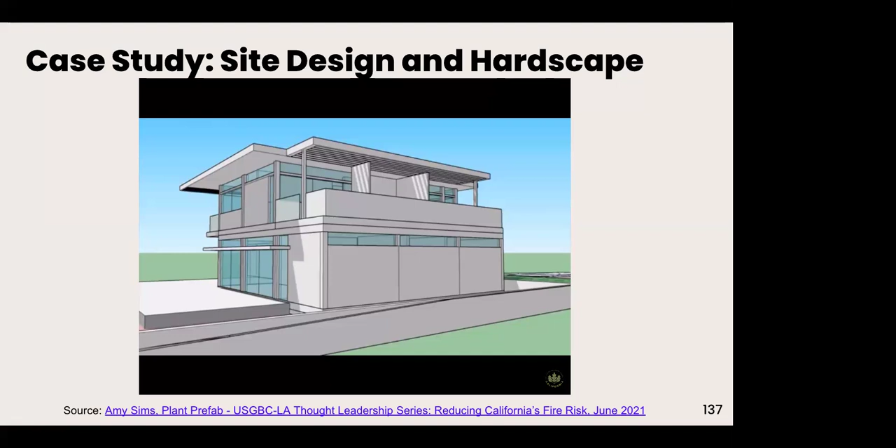Patio and deck furniture should be stored inside the home or at least 30 feet away from the building. Choose furniture made out of non-combustible material. Ensure flammable objects such as brooms and doormats are placed inside the home. Propane tanks for barbecues are vulnerable, as I mentioned earlier.

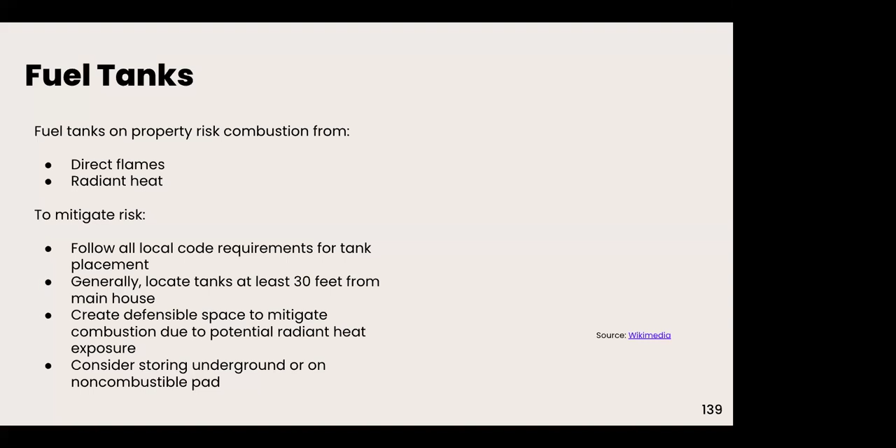Fuel tanks on the property risk combustion from direct flame and radiant heat. To mitigate risk, follow all local code requirements for tank placement. Generally locate tanks at least 30 feet from the main house. Create defensible space to mitigate combustion due to potential radiant heat exposure. Consider storing underground or on a non-combustible pad.

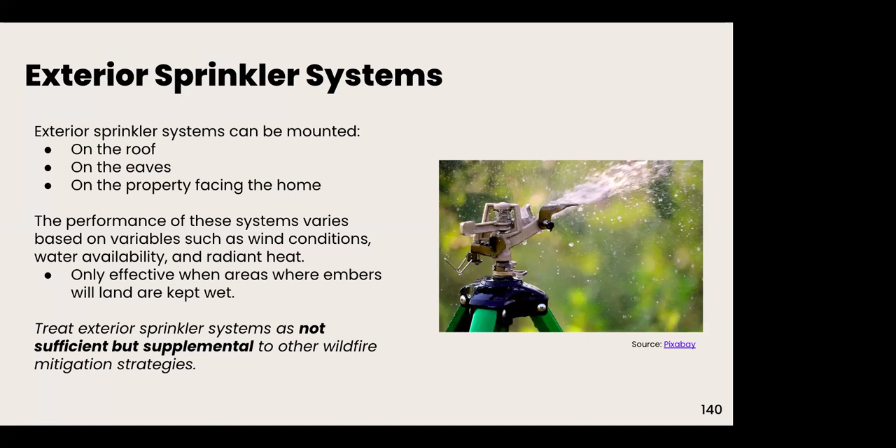What's going to happen if you have a sprinkler system going and you've got a Santa Ana wind that's 70 miles per hour? It's just going to blow in the other direction of the house, but it can aid in mitigation. Next slide, please.

Next slide, please. So here we have a video. Again, it's the fire rebuild in Malibu on Busch Drive.

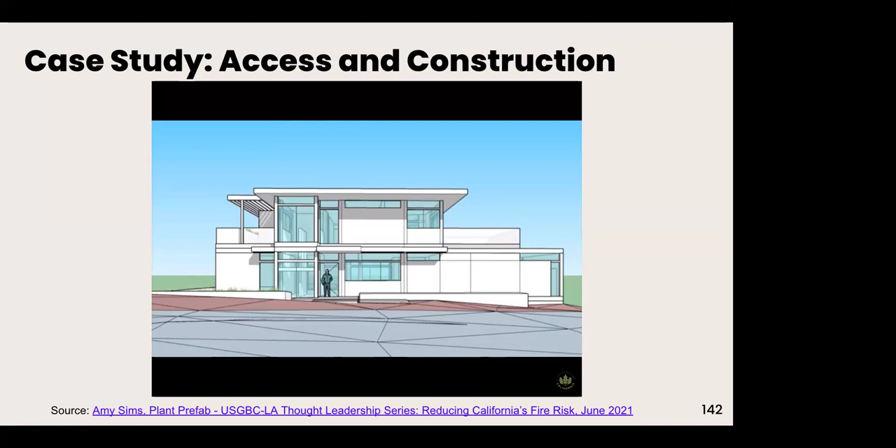Back to Zone 0 in our ember-free area, the placement of trash and recycling can make a big impact. By locating those items inside the garage, we are reinforcing the concept of a debris and clutter-free zone around the home. And lastly, giving free and clear access to your property to the fire department is a code requirement.

Because of the size of this lot, it was easy to create a driveway that has two means of entry, which could allow the fire department to get onto the property from either side. The radius can accommodate the truck to be able to enter one end and exit the other. This ensures the 150-foot reach for their hoses is met. The concrete moat that we've created around the home also ensures a clear path at all times for this access when needed.

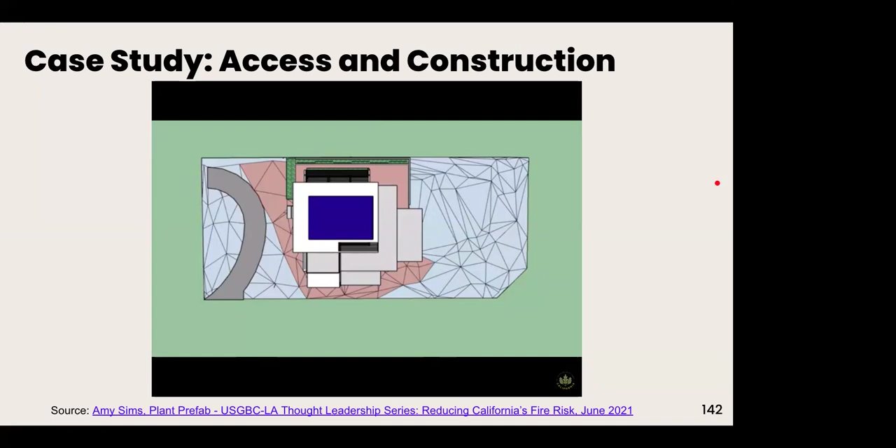Now let's pivot and talk about what needs to be done when you're actually building the home.

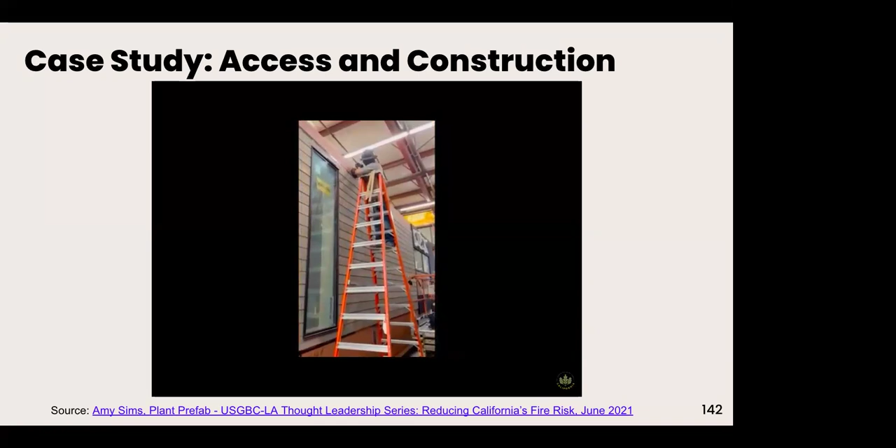Currently, we don't have any WUI projects under construction in the factory. We have many fire rebuilds, like the SketchUp model I shared with you earlier, that are in various stages of permitting. So instead, I wanted to draw a parallel between cold climate construction and fire resilient construction, in the sense that both need to keep the elements out. Obviously with fire, we're keeping embers out. With cold climate, we're keeping out cold weather air. So our tight sealing of that exterior wall assembly is super critical.

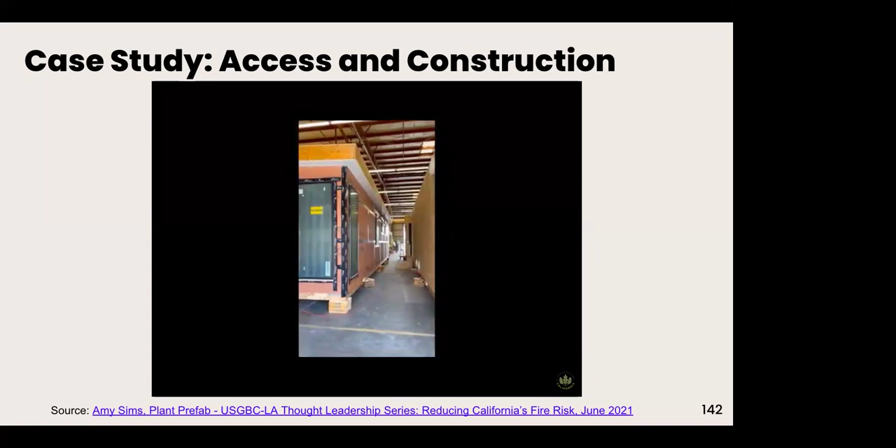We're sealing doors and windows. We're sealing all the penetrations, just like we did with fire resiliency. This particular module shows exterior siding. It does get installed when it's appropriate based on the design. We're using the Zip system as our exterior sheathing and weather barrier. In the instance of a fire rebuild, that would be replaced with LP FlameBlock. You can see here another closed soffit on the roof.

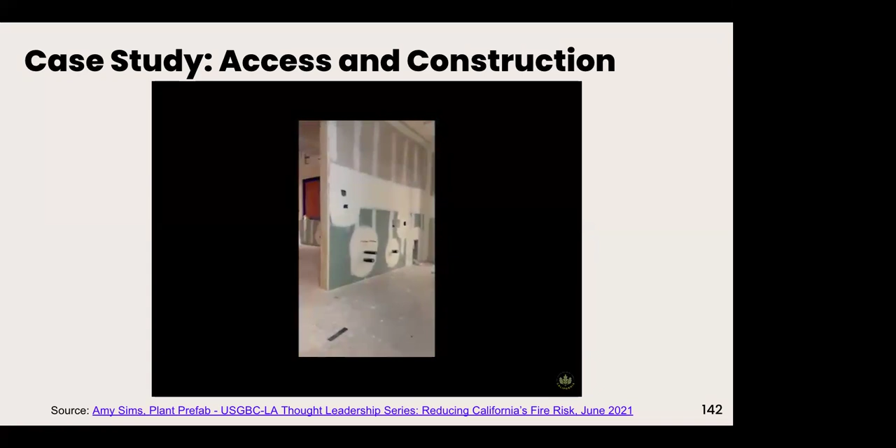Now we're going to go inside. This is a ground floor module. This is a mud room, so they've got a sink and laundry down here. We're now standardized on type X 5/8 drywall everywhere on the interior, whether it's a fire rebuild or not. We think that's really important to the overall design. We're sealing all the windows, you can see here in this image. And then lastly, what you'll see is the finished product. There's a lot that you're not seeing in this.

So for fire recovery, I'm going to hand over the mic to Arezo. Hello again. So we're going to talk about fire recovery.

Post-fire checklist: before entering a burn site, you're going to want to wear protective gear, seek professional help to remove potentially toxic materials, and minimize foot traffic, equipment, and disturbance on the burn landscapes. Activity on slopes will increase the likelihood of erosion, so be careful of that. Consult a professional to determine whether you need to install soil stability measures, slow water from channeling on slopes, and prune back and give fire damaged vegetation time to recover.

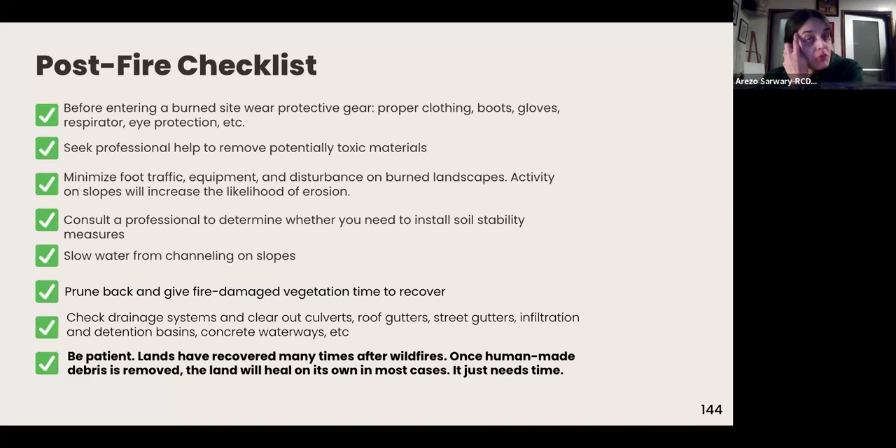A lot of our native plants can recover from fire. Check drainage systems and clear out culverts, roof gutters, street gutters, infiltration and detention basins, and concrete waterways. Be patient. The lands have recovered many times after wildfires. Once human-made debris is removed, the land will heal on its own. In most cases, it just needs time.

Fire recovery and soil erosion: the roots hold soil together, so recently burned areas are prone to landslides. Debris flow can occur 2 to 5 years after a wildfire.

What you can do to help is leave the mess, keep it under cover with mulch or chips. Use mycorrhizal fungi that'll hold the loose material together if given the right conditions. Minimize disturbance and soil compaction, monitor stormwater runoff, hand plant in the worst burnt places, mulch to protect new seeds, and refer to professionals in your jurisdiction.

CAL FIRE assembles a watershed emergency response team that focuses on post-fire conditions, and there are a lot of post-wildfire resources out there, some of which are linked on this lesson plan.

In bad fires, the burning creates a waxy substance over the soils and makes them hydrophobic, meaning they need more help absorbing water and nurturing seedlings. You can help replace lost roots and ground cover by hand planting seeds in the burnt areas.

In the past, when communities were built, there wasn't as much information to process and benefit from. Now that's changed and a lot more resources and information are available. So first, as always, be mindful of that region's history in terms of geographical characteristics, fire patterns, and native vegetation. The world's always evolving, so you want to rebuild green with water and energy efficiency in mind.

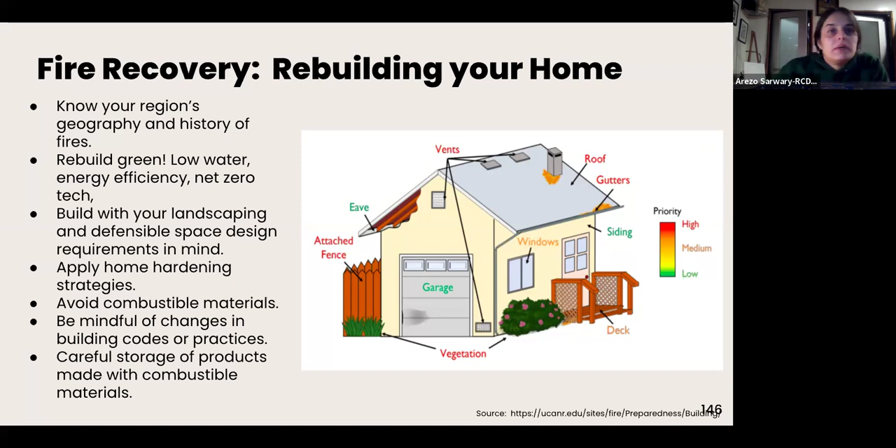Preparation is key. And when it comes to natural disasters, some say wildfires are easier to deal with than tornadoes, hurricanes, and earthquakes because the amount of steps required to be adequately prepared for wildfire defense is less than that needed for other natural disasters. But leading the effort, governmental organizations from all the firefighting departments to California Department of Forestry and Fire Protection, also known as CAL FIRE, the National Park Service, and the U.S. Geological Survey, as well as others.

Councils have formed to support activities in their local region, like the Marin Wildfire Prevention Authority, which helps with education and outreach, home assessments, reducing wildfire fuels, improving evacuation systems, providing grant funding, and more.

In our region, we have the San Gabriel Valley Council of Governments, or SGV-COG, the Southern California Association of Governments, and a bunch of others. If your community doesn't have this, you can form one. There's fire safe councils and all kinds of great organizations that do this work.